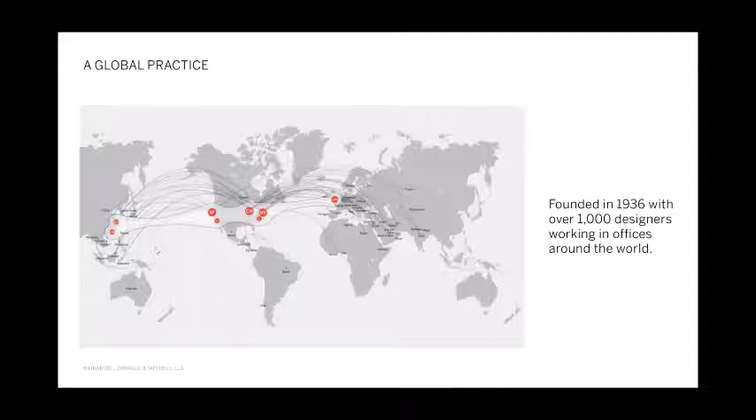So first, I'd like to start with a quick overview of SOM. I'm sure many of you are familiar with our firm, but just a quick overview: we are a global practice founded in 1936. We have over 1,000 designers across the world. Our big offices are in San Francisco, Chicago, and New York, as well as London, with a growing office in Los Angeles and Washington, D.C. But really, from these locations, we're trying to serve a global practice.

We have integrated services—all the disciplines that would be needed to design a building, including architecture and structural engineering, MEP, interior design, graphics, planning, landscape, and open space. All of these disciplines come together, and we all think of each other as designers; we all have something to contribute to design.

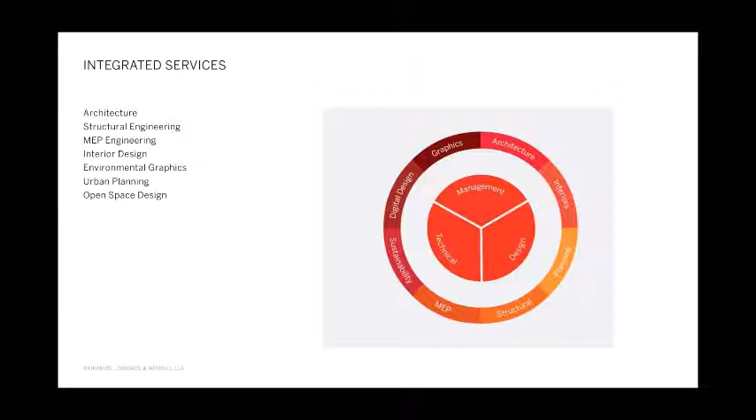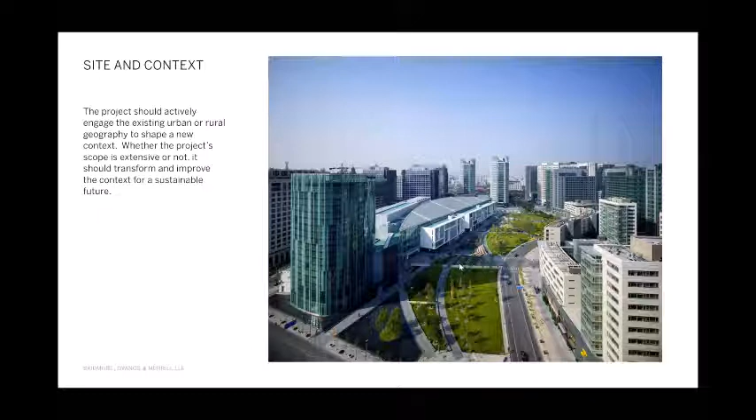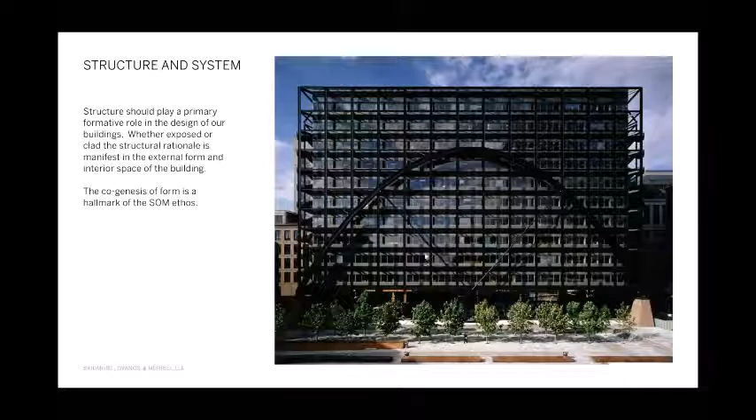Another part of our ethos is that structure and system form a primary role. This is the Broadgate Exchange House in London over railroad tracks, and the structure of the arch and hanging the building to avoid the structure coming down on the railroad tracks below was an integral idea to both architecture and structure.

The shape of the building is integral, that the function of the building and its shape should be one and the same. An office bar, an elongated bar of office space, views out to the river with the core set in the back, all about organizing the building and the shape for its function of office space.

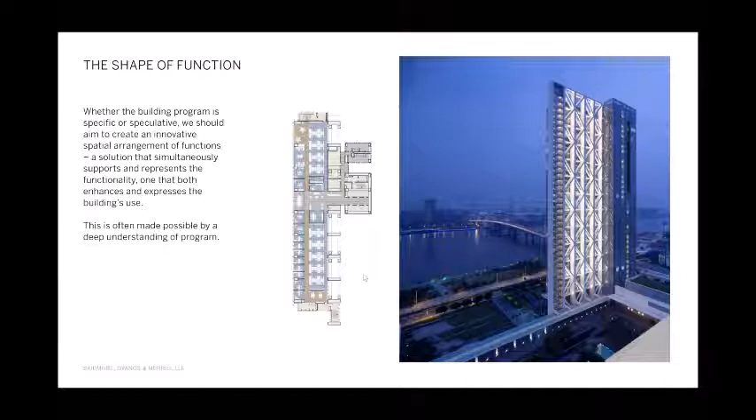We should be sensitive to climate and sustainability. This project in China is shaped to gather the wind through the openings in the middle of the building, with wind turbine electric generators to generate electricity for the building, as well as photovoltaics and geothermal systems, one of the first net zero energy buildings in China.

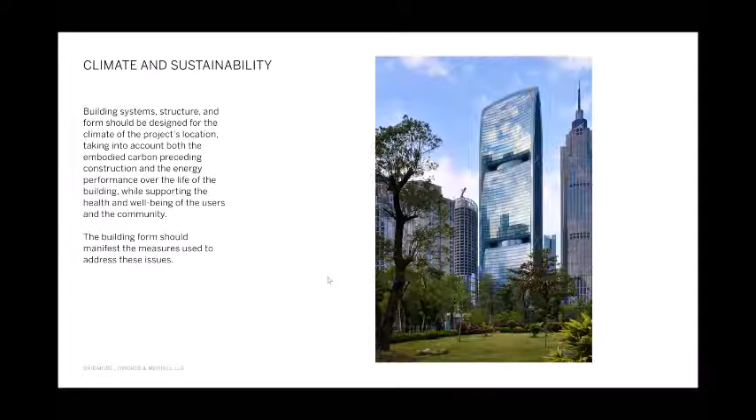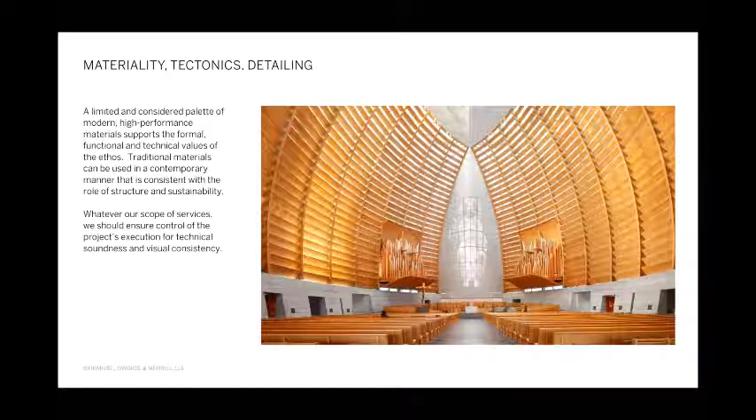Finally, the materiality and tectonics, the fine craft of the details all come together harmoniously to inspire the space and invoke emotion in the design. Detailing and tectonics should be very clear and legible, that when you walk in this space, you're occupying the space, things are clear, well proportioned, and there's a harmony of the space.

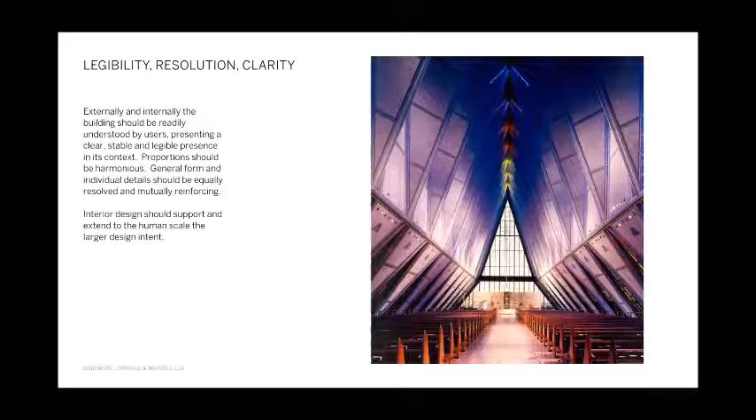One of the last ones is resonance, that when you look at a building, it should resonate with you as an observer of the building, whether you're outside or inside, and that it respects the heritage and culture and aspirations of the city.

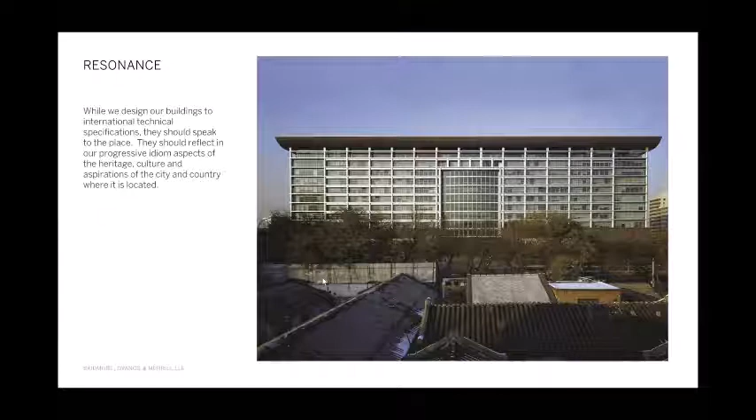So with that little background and the type of buildings and designs we're looking for, how do we as structural engineers contribute to this idea of architecture and structure and these items of our ethos?

Technology, we can't help but be excited about it, and I'd like to show you from the blank piece of paper through the individual little pieces of rebar, how we can contribute to this idea. So we think about technology and how technology inspires design.

This is the America's Cup sailboat racing. Obviously the sailboats of the past on the left, and what technology is doing to these boats to make them go faster, but also that their level of design is so high and well crafted. Technology is really enabling this.

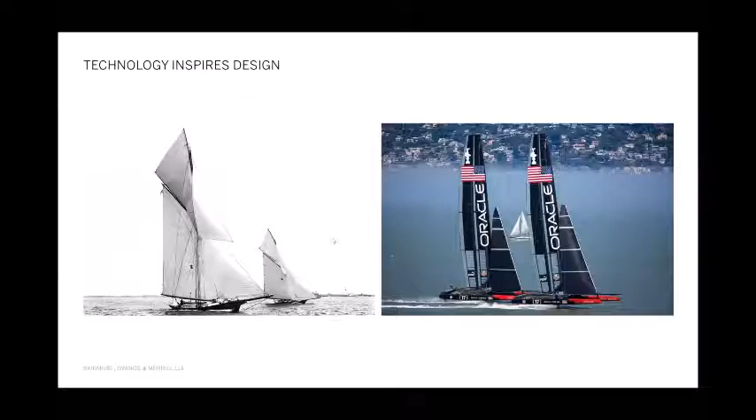And this comes true in not just sailboats, but of course our structures. This is Frei Otto's soap film technology that he used to determine the curvature and shape of the roof of his Munich Olympic Stadium.

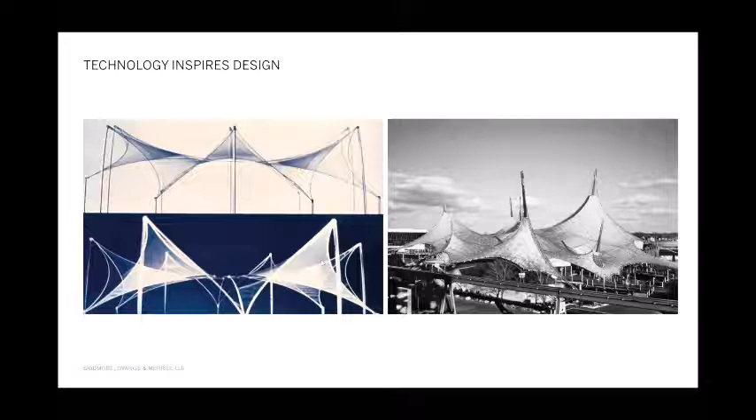Whether it's soap films that Frei Otto did, or what we currently have is this tool set and knowledge of technology tools. One I'd like to highlight today is a commercial software by Altair, this topology optimization in the upper left. The car industry and aeronautical industry use this quite well to stiffen and optimize frames of cars or fuselage of airplanes, and we're bringing this into the building industry now.

But there's lots of tools. We have our own in-house wind tunnel. We use genetic algorithms, processing through Grasshopper and Rhino and surface optimization. All these tools are at our fingertips, ready to tackle the problem.

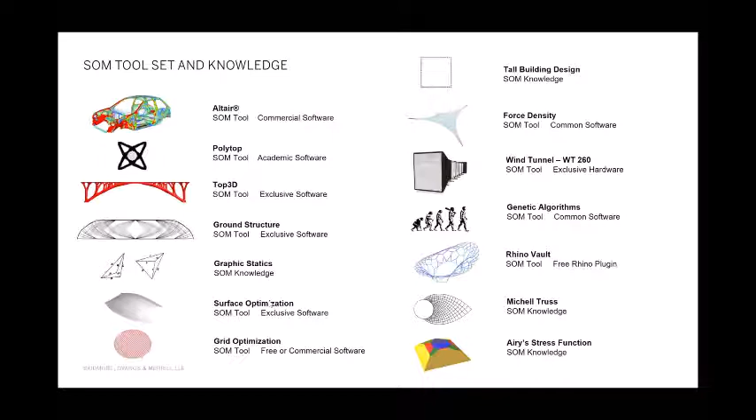But it's difficult to know what tool to use. Design is not black and white. There's a very gray area in between, and these tools really can be used for exploring that gray zone in between and inspiring us to understand design opportunity.

What are we searching for in these opportunities? As structural engineers, we're focused on efficiency and cost, of course, but not at the expense of how long it takes to build it, or how complex it is to build it, and how it performs in a wind or seismic event. And of course, it has to be elegant and appropriate as it fits in with the architecture and resonance of the building.

Some ideas about geometry optimization, these tool sets for geometry. Now we can start with thinking about the John Hancock Tower and that geometry and taper of the tower for wind, and the integration of the X bracing at the perimeter.

What's interesting about this building is that 100% of the system is on the perimeter. There is no structural core interior to this building. It is only gravity columns. So the shaping of the geometry, and the shaping of the X bracing, was instrumental in making that happen.

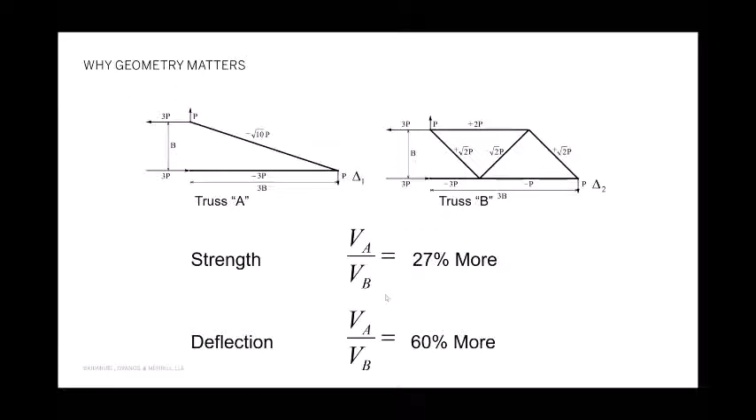The geometry of those braces is very important. Here's a quick demonstration about why geometry matters. If we take truss A on the left, truss B on the right, and look at their difference, you might think A would be better, a simple triangular diagram, but really B is a lot better in terms of strength, 27% more, and in terms of deflection, 60% better. So with just the same height to depth ratio, the cantilever truss B is far better with simple geometry moves.

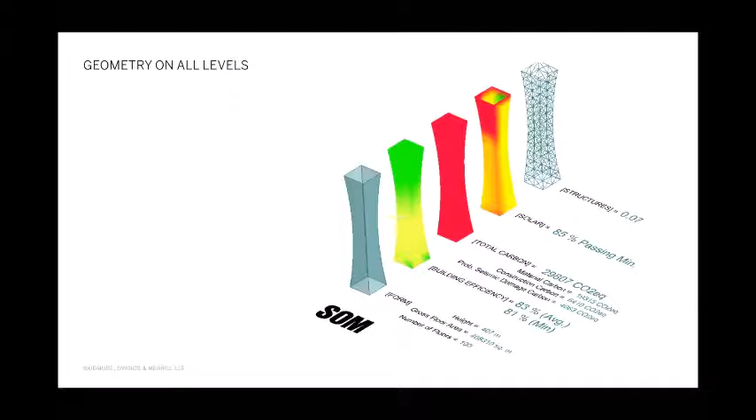So how should geometry be measured? Should it just be based on structure in terms of proportion for trussing or others? But can we measure this geometry in other factors, such as the efficiency of building floor plates, or the carbon involved in the building, or the solar radiation on the facade, how it gets wider toward the top, or how it's affected by neighboring buildings? All these items can be thought about at the same time that we're thinking about the geometry of structure.

It's more than just strength and deflection. It's carbon and solar and architectural floor plate geometry as well.

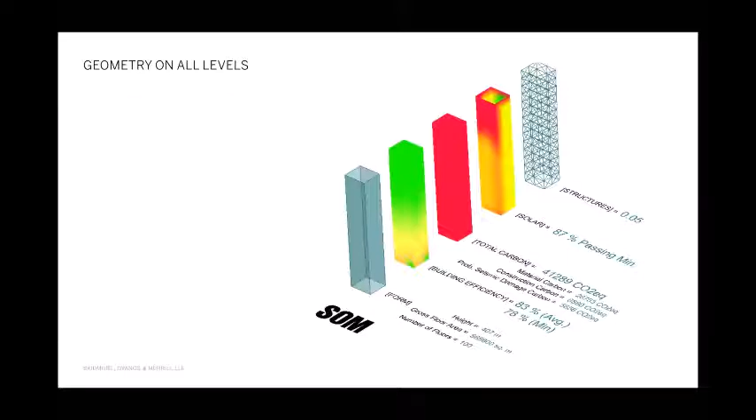So here's a competition we had in Korea, where we started from a blank piece of paper and thought about the geometry of this tower as it relates to structure, as well as floor area and shaping for wind. We used genetic algorithms to shape the tower such that the floor areas were maintained, with a maximum diameter and a minimum diameter at the base to fit the site, and how the tower tapers to minimize wind response while maintaining the requirements of architecture, floor area, solar, and carbon.

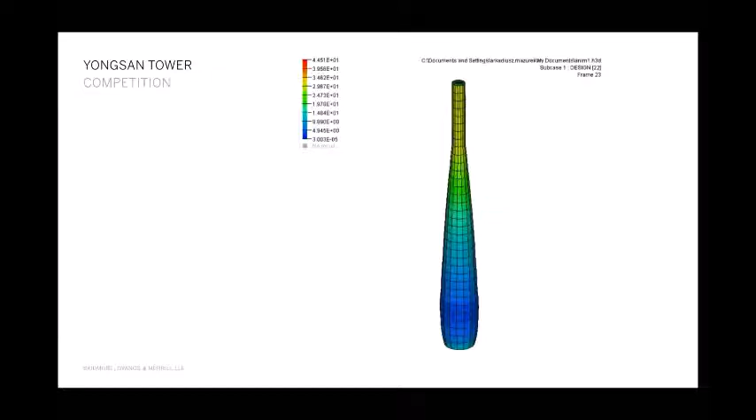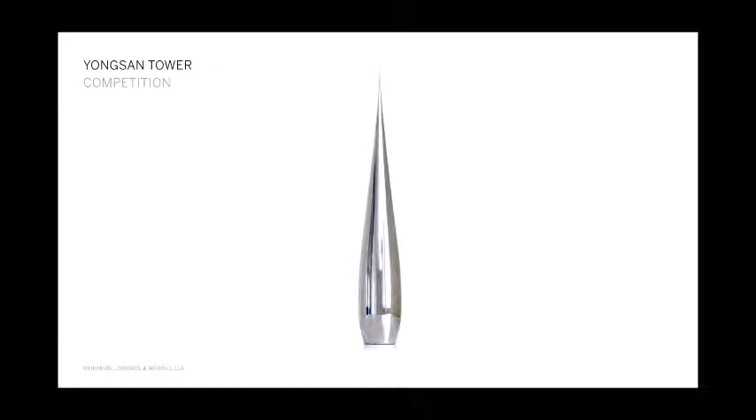So here are iterative steps along the way where we're tracking all of these things. In the end, we thought this was quite an elegant shape achieved through the use of genetic algorithms.

From geometry, we can then start to get into the system. What is the system of a building, the structural system? For this example, we'd like to talk about a bridge project at Los Angeles International Airport, LAX, where there's a central drive and parking area, and a desire for new bridges, seven of them, extending from the central parking area over to the terminals for each of the seven terminals. In the upper right-hand corner, you see a picture of the bridge as it is today, with a simple diagonal box truss expression. LAX asked, can we do better in welcoming passengers to the terminals?

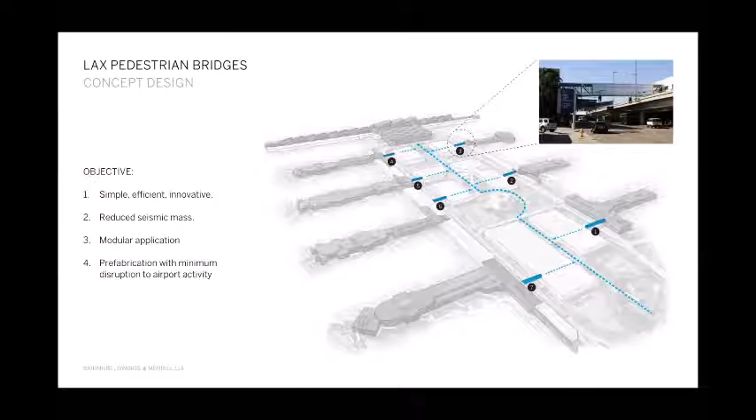So we looked at our background in optimization of trusses, and what we find really interesting is that when you have a cantilever truss, say in a tower or a beam, with a load like this red arrow pointing down, the X bracing's intersection point is not at the midpoint of its bay. It's pushed up. In this example bay extruded here in the middle, you see that this mid-height node is not exactly in the middle—it's at 3/4 height. That's the optimal location for the brace angles.

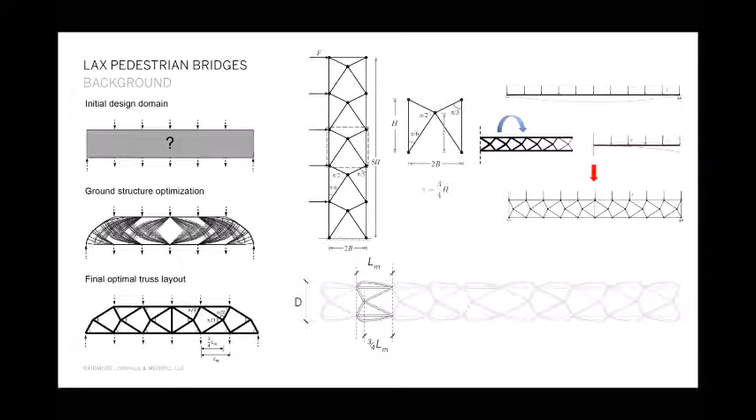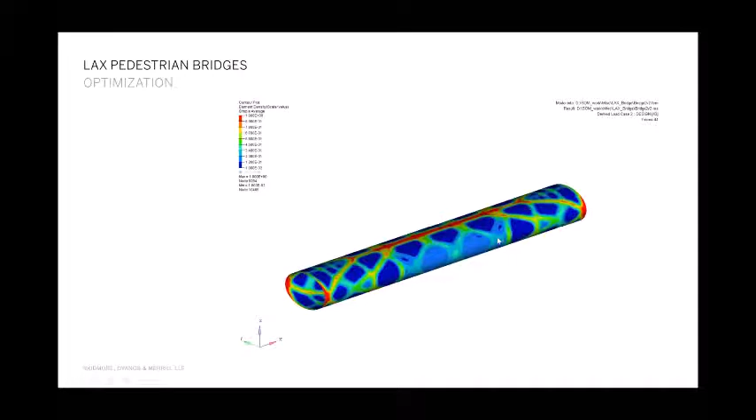So we thought about this bridge as it expands from the parking garage over to the terminal. This is an elliptical shape, thinking about a tubular structure, and using Altair and topology optimization to understand the natural force flow of material on that particular shape. What we're seeing is that these truss lines intersect at that same 3/4 high point in the bay.

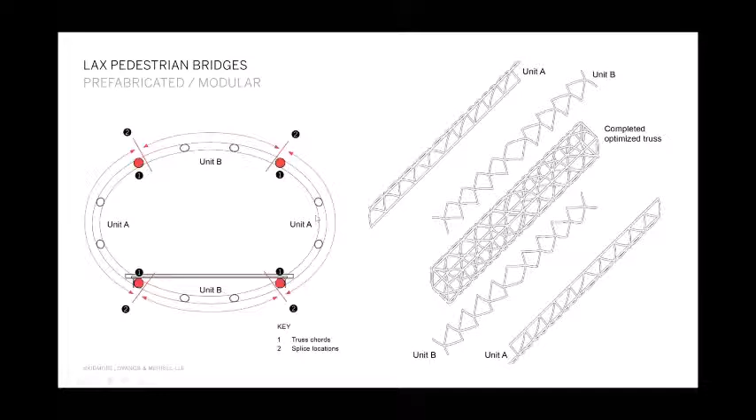So we interpreted that diagram, thinking about it in elevation, thinking of it as a kit of parts. How could we build it? How could we prefabricate units, bring them together with simple, repetitive nodal connections? And then what could it be as an expression and an experience, traveling from the parking garage over to the terminal?

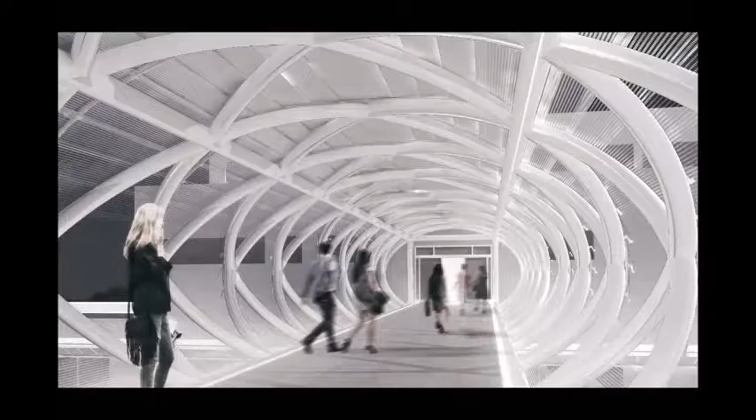So from the system, from the structural system to the components of a system, how can we think about designing components of a building that are expressive, that are efficient, and that are rooted in these fundamentals?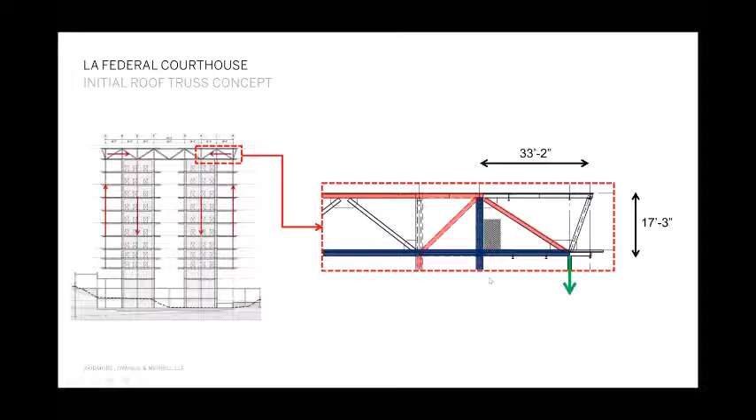But we thought about, can we do better than this? Is there more interesting geometry that's more efficient, better use of steel, better deflection perhaps? So again thinking about topology optimization, we set up a three-dimensional roof truss space that allows the topology optimization to determine where the material should be in order to be most efficient.

And of course, we saw this triangular form, a little bit different than our initial configuration. So we were interested in that, took that into 2 dimensions, and looking at it we thought, wow, what's really happening here is when we have supports on the left and a hanger load on the right, we're really getting this bicycle wheel type of truss, where this compression ring wants to form up and over, and these tensile spokes come back down to the middle.

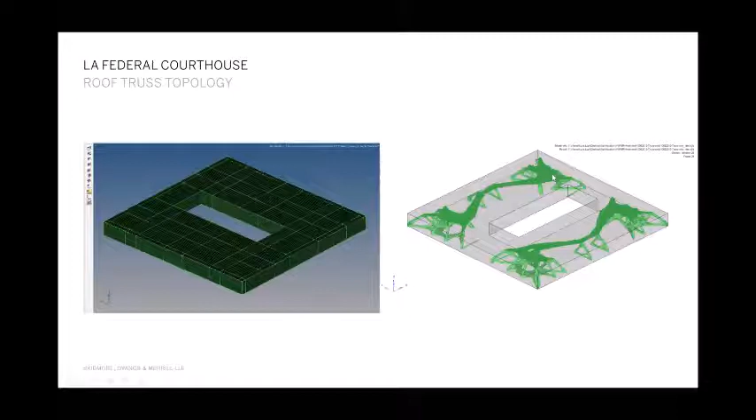This white space here is a required door opening for a corridor, architecturally. So we can even include that and let the optimization flow around even required openings.

And so what we determined is we flipped that bicycle wheel upside down and used it in the geometry on the bottom, where we have this bicycle wheel in compression and these tension spokes in red. We determined this saved 14% in steel material and had better deflection performance as a result of this bicycle wheel approach. And here it is in its built form.

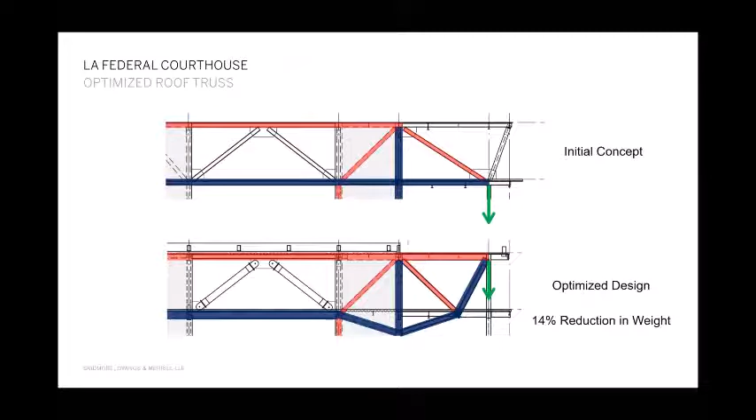So we had temporary compression columns at the bottom, allowing these columns and floors to be erected in a conventional bottom-up approach, connecting the roof truss, making the welded connections, and then pulling out the shoring column at the bottom to transition the load in the column from compression into tension, with the load going up through the truss and back down the shear wall cores.

So now, lastly, to the detail level. How do we think about this use of technology and components all the way down to the individual details?

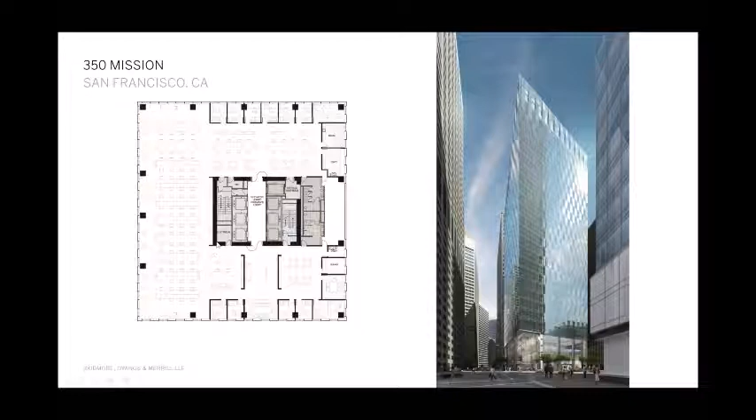But how do we think about this floor plate with a missing column as well as a long span for office space from the core to the perimeter? That long span is 43 feet, or in meters maybe 12, 13 meters or so.

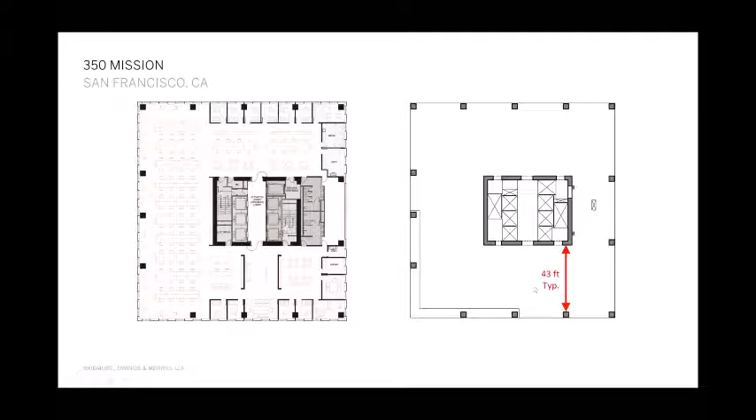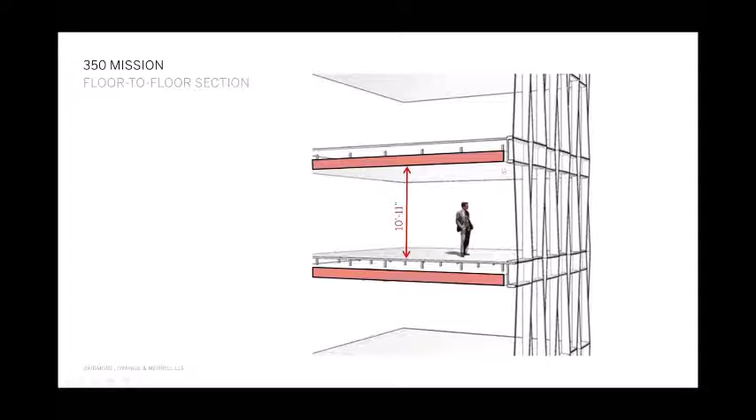And what we would conventionally think about for office buildings for that span would be steel beams. But here we thought about concrete and the use of flat slabs, no beams, and to have a raised floor system where all the mechanical and electrical systems are run, such that giving office space complete floor to ceiling, full height, 10 feet 11, or almost 3.5 meters or so, with floor to ceiling glass and its view out to that prominent intersection over the city.

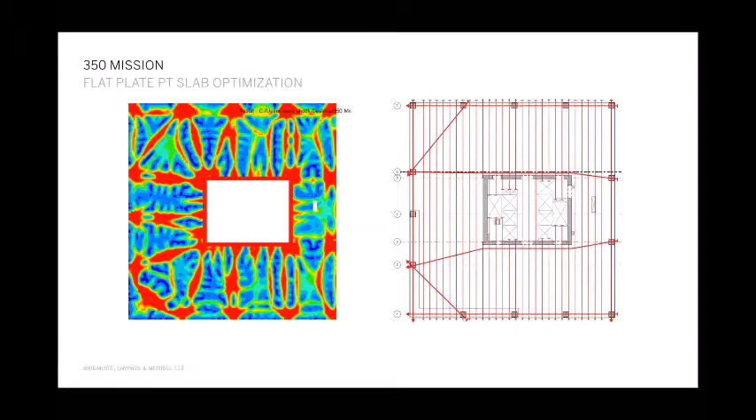So how do we think about post-tensioning, PT, inside of a slab, for a particular support condition of the core and the columns?

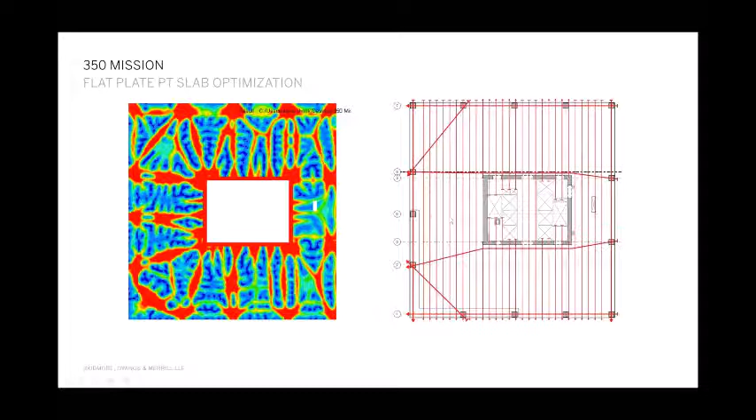We thought about this optimization to understand the lines of optimal material placement spanning from the core to the perimeter. We were inspired by this and placed the lines of post-tensioning in the floor to correspond to this diagram. The result is this long span flat slab with no beams, exposing that slab to the occupants of the floor.

The raised floor system, the mechanical system, will come in here on the floor level and extend out over the top of this upturned beam. This upturned beam gives room for additional stiffness and additional post-tensioning to reach out to the corner for the missing column. You can see the ductwork included in here, so the mechanical system can plug into this, go through and supply the fresh air to the perimeter slot diffuser along the window wall.

Here the building is under construction.

And lastly, the thought about this optimization of post-tensioning was really interesting. The next project we applied it to was this 75 Howard, a residential building in San Francisco, where we spaced the locations of columns and core with high regard to where the units, the residential units, are, placing the columns as thin wall-like elements between the units, such that the units themselves have uninterrupted space and the columns are buried in the wall. Except for the corner.

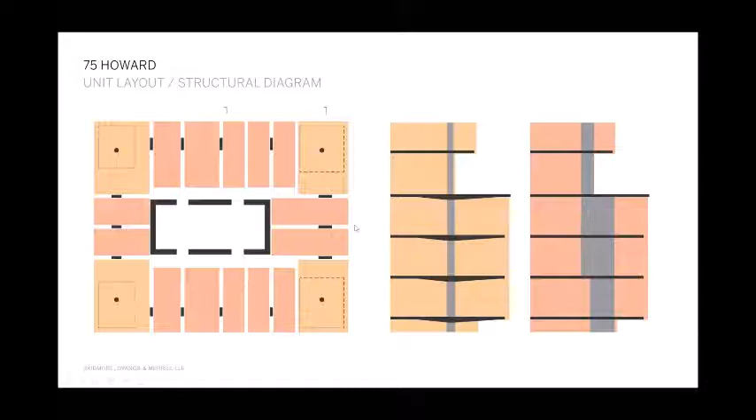So we looked at this optimization again for our column locations and supports, where the optimal placement of material would want to be. Then we overlaid trace paper on top and started to sketch. What's interesting is these lines are not necessarily straight. These lines of optimization are highly curved. So should we curve the post-tensioning around and follow these lines?

We found that if we do this, we save 25% of the post-tensioning material required and had better deflection performance of our slab.

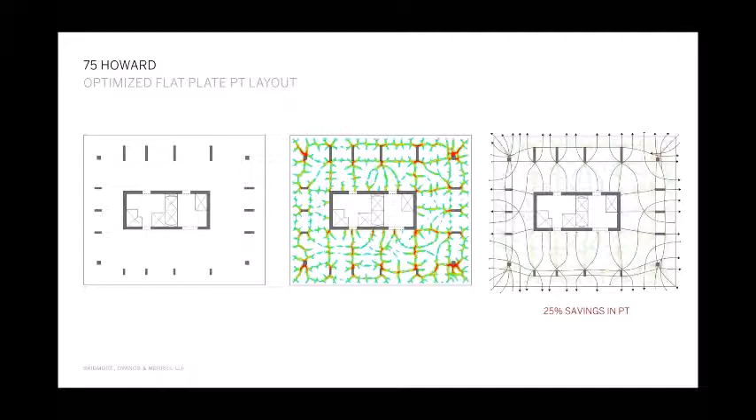Here's an interior unit. Look, with this column pulled back, helping to define the dining room space, the living room space, and the kitchen. This tapered column capital is a design element in the space, with the column and its views out to the San Francisco Bay.

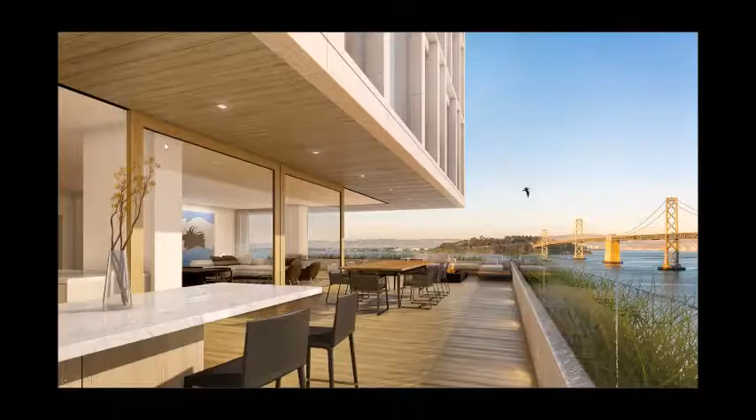Pulling these columns back, whether they're in the unit above or at the corner, allowed for these opportunities to recess the glass back and make these open terrace levels that have indoor-outdoor California living.

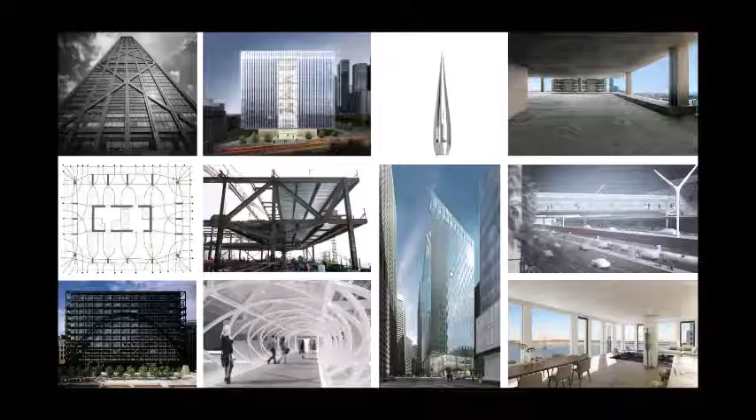So that's what we thought about our design, stemming back all the way to our historic and notable structures like the John Hancock Tower and Sears Tower, our ideas rooted in architecture and engineering, and pulling that forward to today, and opportunities using technology to help inspire us about whether it's an overall building shape or a system or a component, or even down to the layout of post-tensioning in a slab. There's opportunities for design at all levels, and we are all designers.